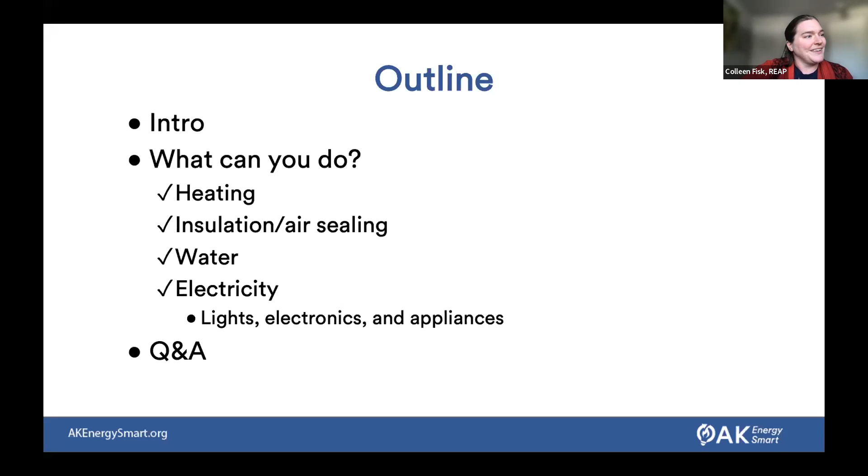When we're talking about reducing our energy use, we talk about efficiency and conservation. They're very similar and related, but conservation has to do with changing your behavior—being able to do things you can control, like turning off your lights, choosing to ride your bike instead of driving a car. Efficiency is changing your technology, like using heat pumps, which you're going to hear more about—those use that technology.

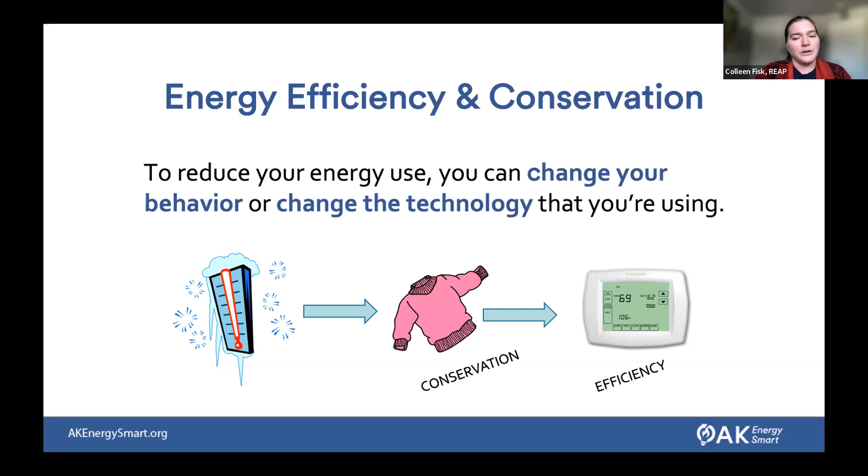Speaking of technology, Steve—oh no, did I freeze? Do you want to try turning off your share? I'll turn off my camera. Tried closing everything.

Maybe that'll help. All right, so the cheapest and lowest carbon fuel is the fuel that you never have to use. The less that you use, the less carbon, especially when you're using fossil fuels like us up here in South Central, using natural gas, or if you're using oil for your heating.

Clay threw a link in the chat—one that can be really helpful is this energy assessment checklist we've developed, which you can use to go through your home and check these things to find where you might be able to use less energy. This booklet, Energy Saving Tips for Alaskans, which Housing Finance Corporation publishes every couple of years, is a great resource too, especially for smaller things that don't require a huge investment but can make big impacts. You can download it for free, or bug Clay at his office in Juneau—he's got a whole stack of them too. I'm sure he doesn't mind people just dropping by to hang out. This is a great resource.

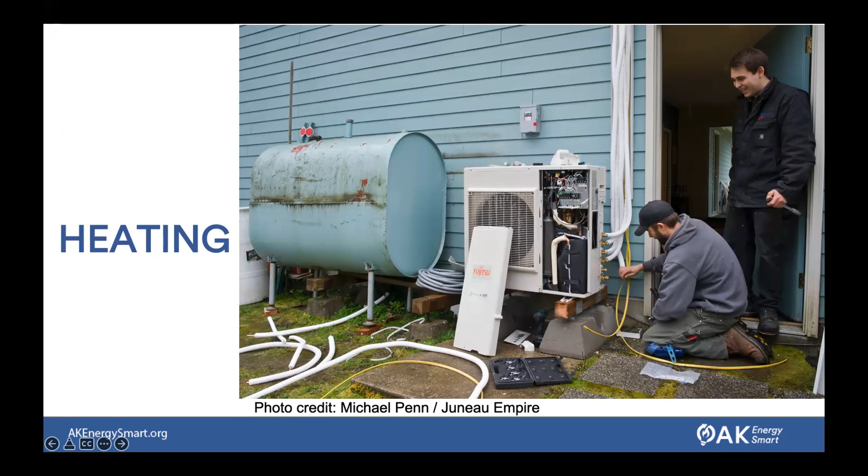All right, great. So it is definitely heating, wherever it is that you get your source of heating from—that is what we spend the most money on. We kind of break this apart from our appliances—sorry, I should have said it that way instead of just straight electricity, because sometimes your heating can come from electricity. So I misspoke, but heating is definitely our biggest energy use. In Southeast Alaska, you can see that around 69% of your household energy costs will just be around space heating. So anytime you're looking for the biggest energy savings, you want to focus on things that will save you on that space heating.

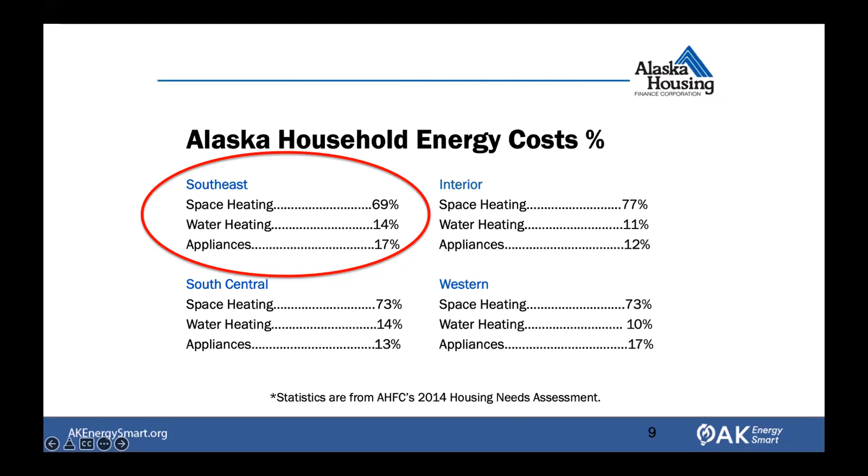Water heating and appliances too are going to be some great ways that you can reduce your energy use and carbon footprint. So Teresa asks, what are some of these things that you can do? I'm glad you ask. I have a few things that are easy to go through.

You can check and unblock any air vents, radiators, and registers. You could seal your fireplace when it's not in use and any other holes, as long as you're not sealing up anything that's supposed to be there for airflow, of course.

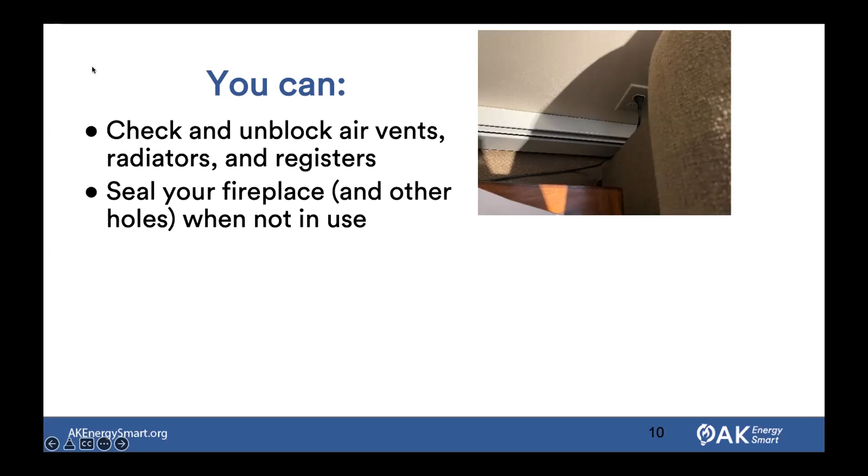You can have a professional tune your heating system. It's recommended to do that at least every year. And if you have systems older than 15 years old, you can replace those. Just like Senator Kiehl was saying in the beginning, with the improvements you see in those technologies, you get really big energy efficiency savings because of that.

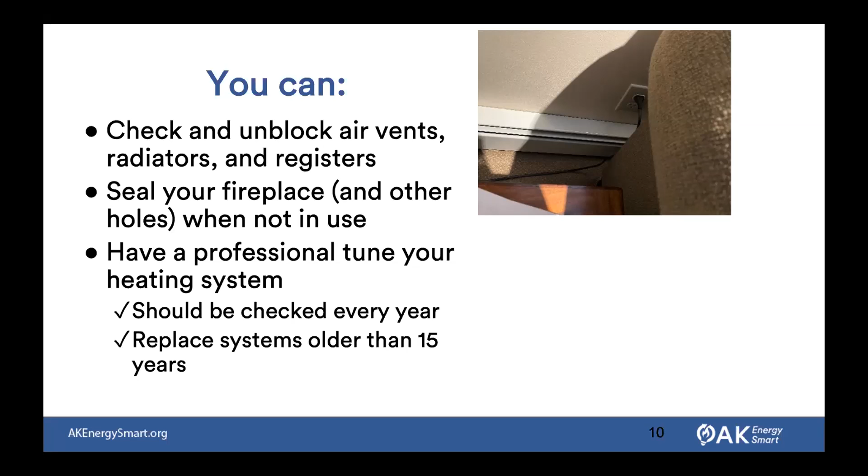And of course, they're going to try to make the case that you should check out heat pumps as your next heating source for sure. And don't leave your bunnies sitting on your air vents - that'll just keep the bunnies warm and not spread out the air.

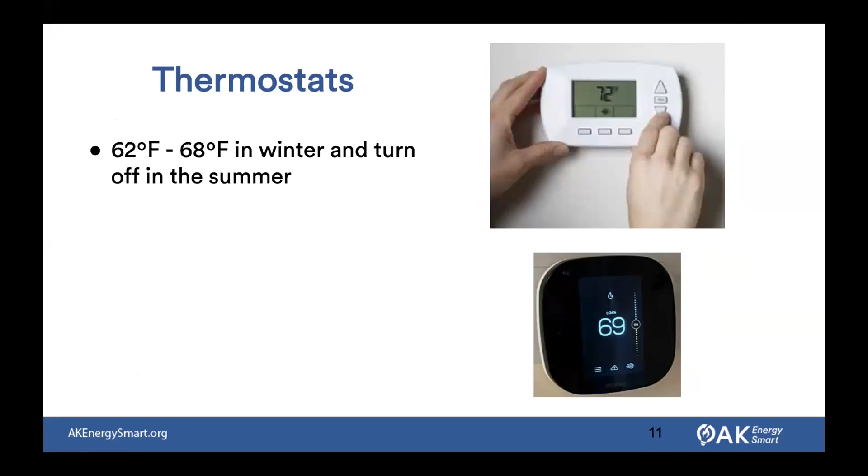For your thermostats, you can actually make big savings by just turning down the temperature a little bit. So 62 to 68 degrees Fahrenheit in the winter. And of course, most of us are turning off in the summer or taking advantage of reversing the heat pump for a little AC. Every degree that you lower for your heating can save you 2% on your heating bill.

So you don't have to be in a cold, freezing, dark house to be able to save energy. You can have really big savings even by just changing the thermostat by a couple of degrees and still not being uncomfortable in your house.

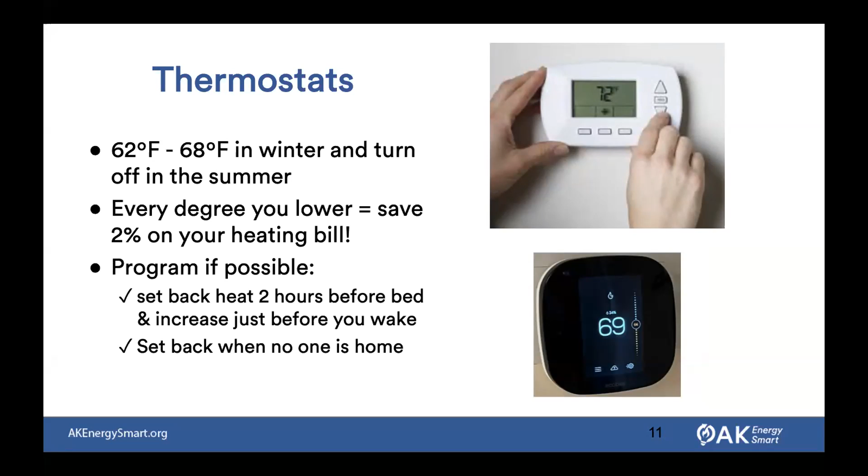If you have a heating system that you're able to program, that's going to provide big savings. So you can set back your heat, say 2 hours before you go to bed, and increase it just before you wake up, and set back, of course, when no one is home, especially if you're on vacation or gone for a weekend, or if you're away from home during work hours.

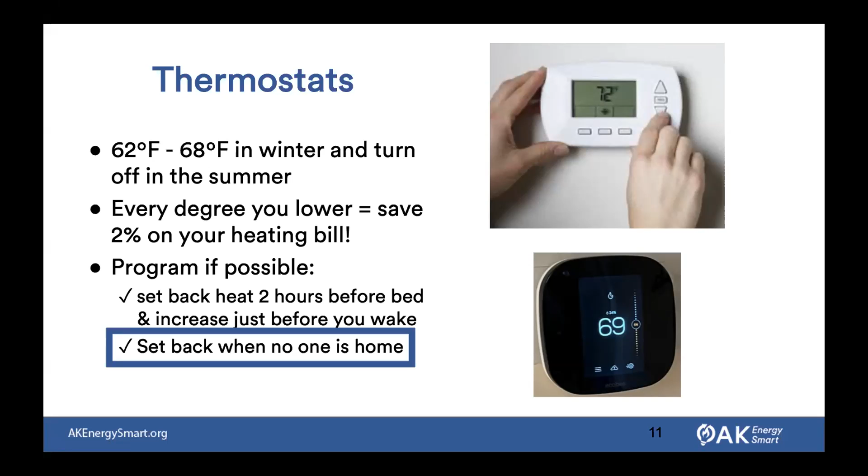That's a big one. So once you start thinking about heating and making sure you're not putting as much heat into your house, next you want to think about making sure you're keeping that heat in. So you want to think about your insulation and air sealing.

Or it could be just because you don't have great insulation. The attic is a great place to make sure your insulation is good, so you're not losing heat out through the top. Vent fans, fireplaces that aren't being used, dryer vents - if you have leaky or cracked windows, all of these are areas where heat can leak out, or if you have negative air pressure, even pulling in some of that cold air. So a lot of areas to pay attention to.

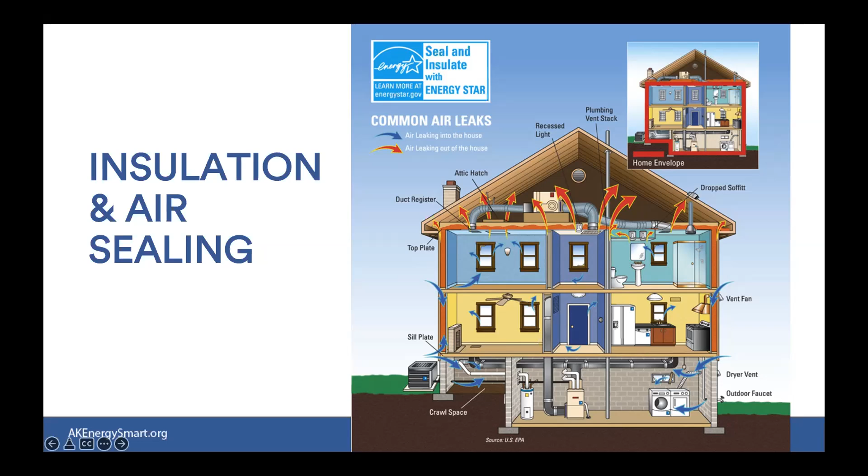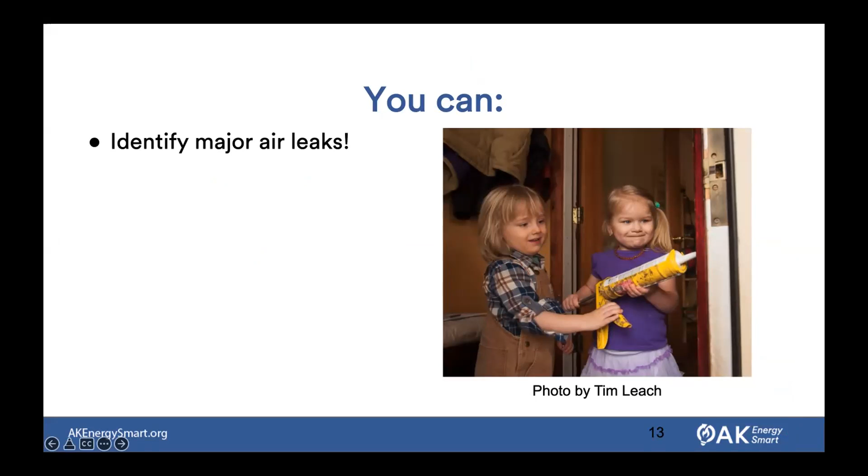So what are the ones we should be paying attention to, because there's so much there? Well, identify where those major air leaks are - find out where the biggest ones are. Of course, you might just know from living in the house. But if you want to check, you can use a piece of string or a small piece of paper and put it near windows or doors, and you can see if it moves majorly. That can be a really big air leak.

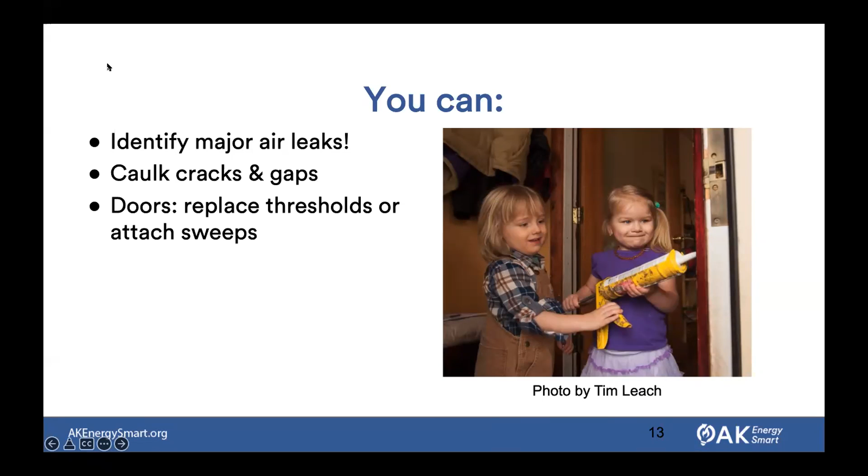You can get caulking that's really inexpensive at home improvement stores, and caulk any of those cracks and gaps around windows or doors, replace those thresholds or attach the sweeps. Even someone who's not a great do-it-yourselfer, like myself - I can do some things, but definitely not big jobs - these little jobs are very doable. I was able to replace the air sealing on my doors, for example, in a house when I purchased it.

Windows: repair and insulate. Unless you have single pane windows, it probably doesn't make sense to upgrade your windows because that can be really expensive with not much payback. But if they are cracked or have major leaks, those are the ones you want to make sure you're replacing and repairing.

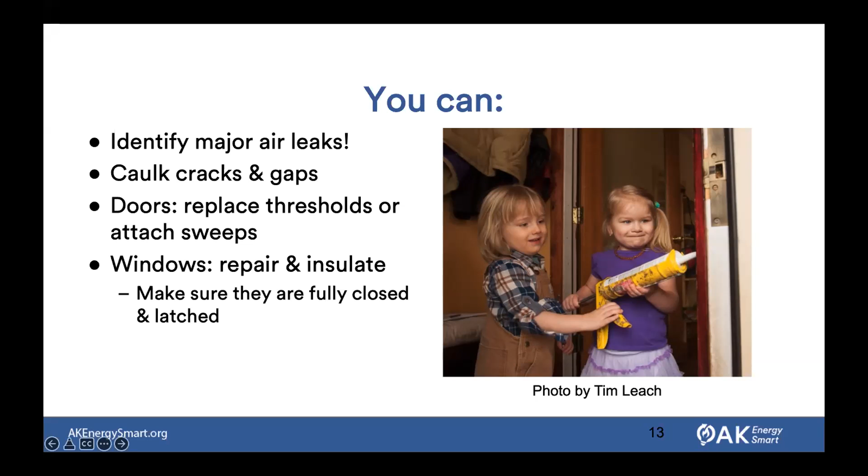Another little trick I learned recently is making sure windows are actually fully latched. If you have a latch, that can help push the seal in on the window so it's not letting small leaks escape out.

It's not just for home safety, it can actually help improve the seal around your windows. You can also install efficient exhaust fans. Like many things with efficiency, there are multiple bonuses - new exhaust fans are much quieter. If you're someone irritated by background hums, having an efficient exhaust fan is a big benefit because it's so quiet.

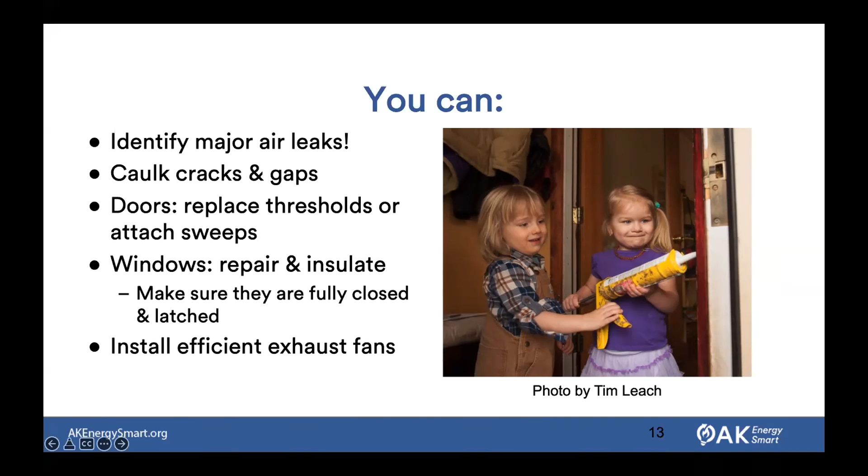For bigger projects, you can get a contractor to identify existing insulation R-values - R-value being how we measure how effective our insulation is, so the bigger the R-value, the better it is at keeping heat in. A contractor can inspect vapor barriers, evaluate and improve attic and foundation insulation, do combustion safety testing, and install a heat pump. You're noticing a theme here with efficiency, energy, and taking advantage of your climate and the technology we have.

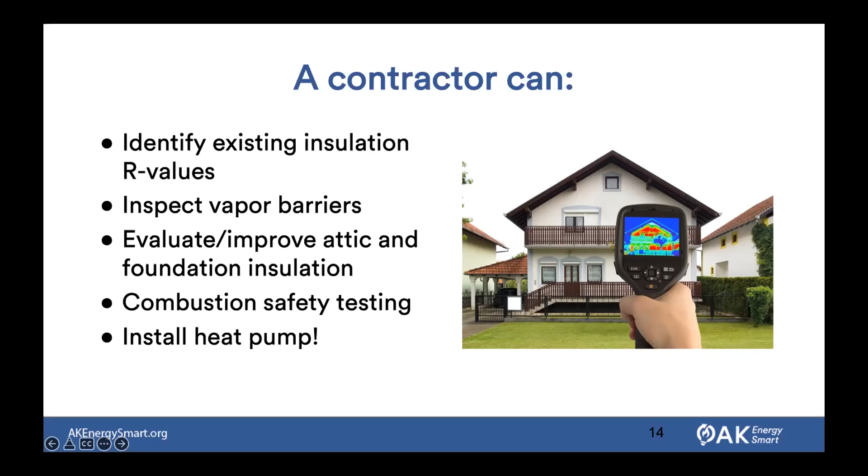So here's some pictures.

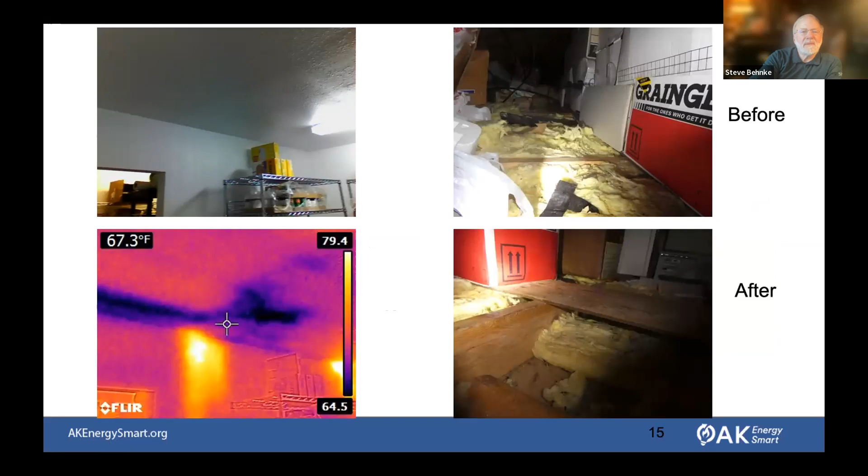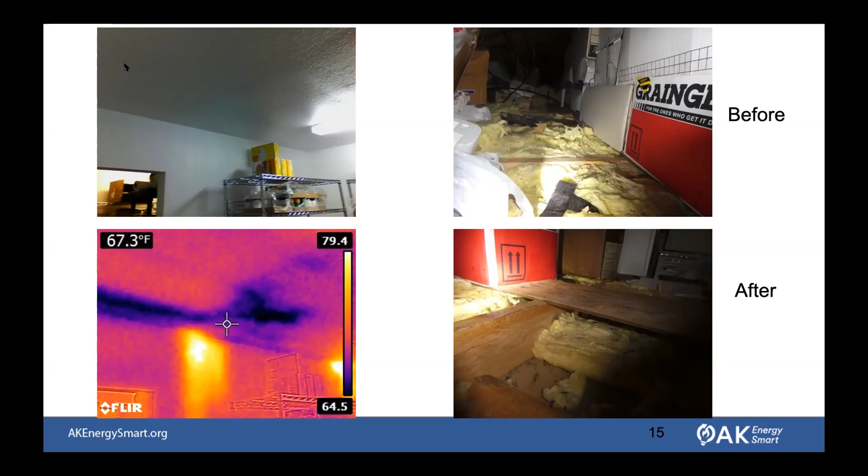Looks like we're frozen again. Maybe it's a solar flare or something, who knows what's going on, something between here and the Mat-Su. I think it's because my 6-year-old stepdaughter is streaming a movie while I'm doing this - that's probably the issue, so she could be busy. Great parenting, right? Yeah.

On the left here, with this infrared thermometer, these darker areas are colder, meaning heat is leaking out of the attic. When we go into the attic and look at these pictures on the right, you can see there were things sitting on top of our insulation, compacting the fiberglass. An easy fix is this person just put in boards and organized the attic - it didn't take fancy materials or brand new insulation, just getting things off the fiberglass so it's not compacted. Fiberglass insulation works a lot better when it's spread out and traps air better, so that was an easy fix to save energy.

So that's our heating. Remember, heating is our biggest way of saving energy and reducing our carbon footprint because we're using oil and natural gas.

Domestic hot water - there are a few things we can do here to save energy. You can check what temperature your heat is set at. If your hot water dial is set to 140, you can save 6 to 10% on your energy bill just by turning it down to 120. For safety, don't turn it lower than 120, but you can turn it down to that temperature and save - plus, as a bonus, avoid scalding or safety issues from it being too hot.

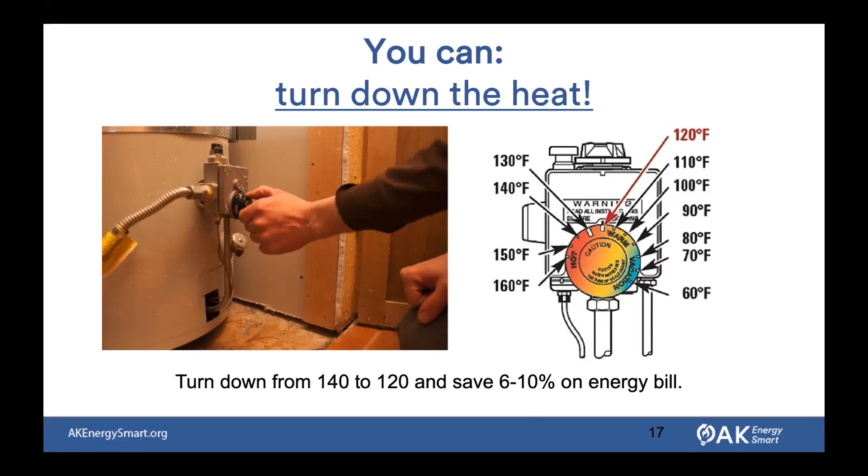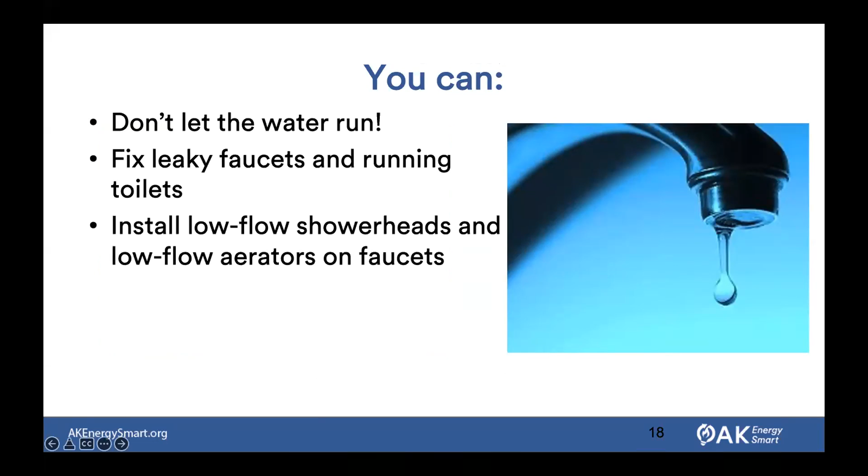Other things you can do: not letting the water run - we've been hearing that for 50 years, but it's still a place to save energy. Fixing leaky faucets and running toilets, installing low flow shower heads and aerators on faucets - small, easy things. And if the manufacturer says it's okay, you can add a blanket to your older water heater, and even potentially upgrade or downsize your water heater, especially if you have an older system.

So that's your tips for water, short and sweet. The biggest one, of course, is checking the temperature your hot water is set at.

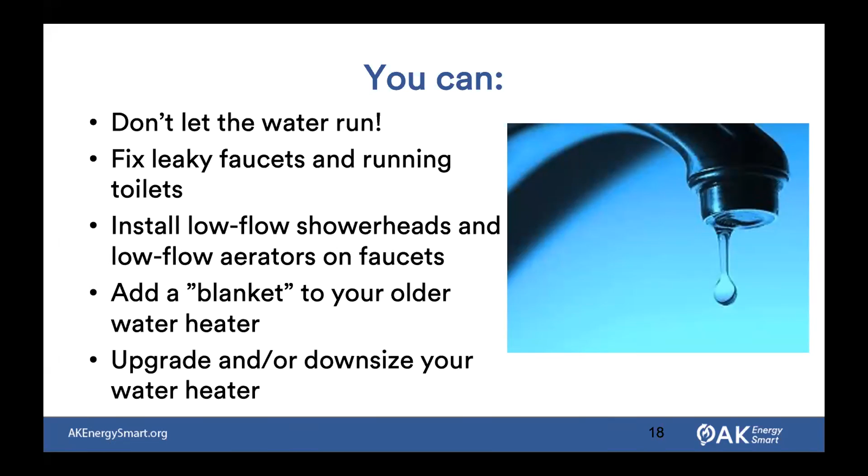On the electricity side of things, instant water heaters are definitely a lot more efficient than keeping your hot water constantly heated at all times. A boiler holding water at temperature uses more energy than an instant hot water heater that only heats as you're running the water.

For electricity, we really talk about knowing how much you're using. You can't manage what you don't measure. So pay attention, using your electric bill. Here's an example that was generously shared with me, an AEL&P electric bill, and you can look at how much energy is being used.

This one's on the larger side. I'm guessing there's a heat pump involved in this house, so a little bit on the higher side, but you're able to track this and look at your trends over time. This is a great little graph that's included with your electric bill.

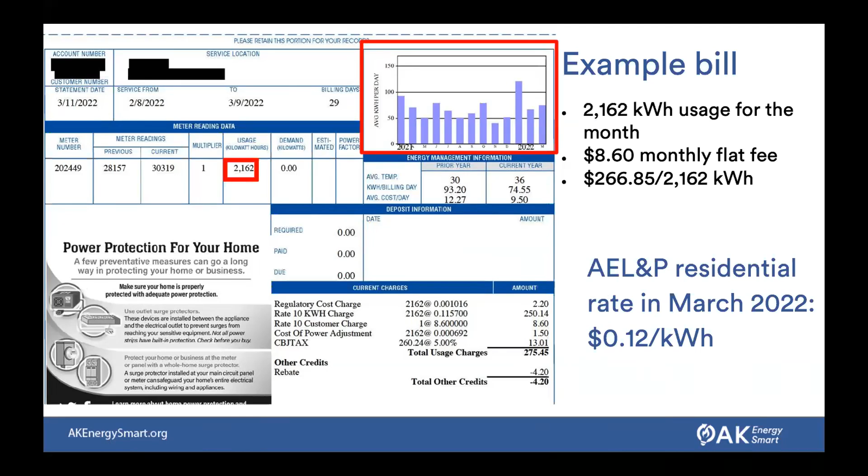You can see your residential rate, so AEL&P is about 12 cents per kilowatt hour compared to 19 to 20 cents per kilowatt hour for us up here in Anchorage and Mat-Su. Another cool thing is your online management system will also have even more details.

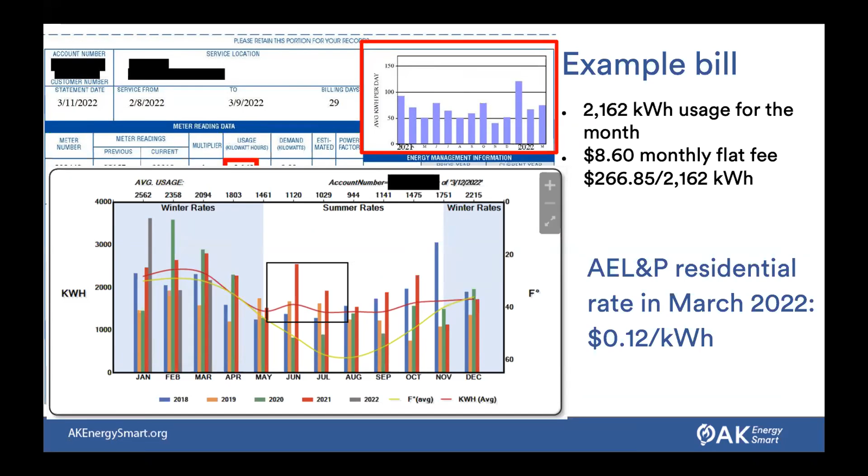There's a nice little graph comparing your temperature to your electric usage over time. So if you're a nerd about energy, which I'm just going to guess you might be if you're here with us tonight, this is a great way to dig into it by taking advantage of that online portal for your electricity usage.

Once you're looking at this, you're keeping track of your electricity. Lighting is going to be the biggest savings on your appliances and electricity, aside from, of course, any heating that you're using from electricity.

We've been hearing for 50 years: turn off the lights when you're not using them, and use more efficient lighting. Most of us are aware of LED light bulbs, but check the ones that use the most, potentially Energy Star fixtures and lamps.

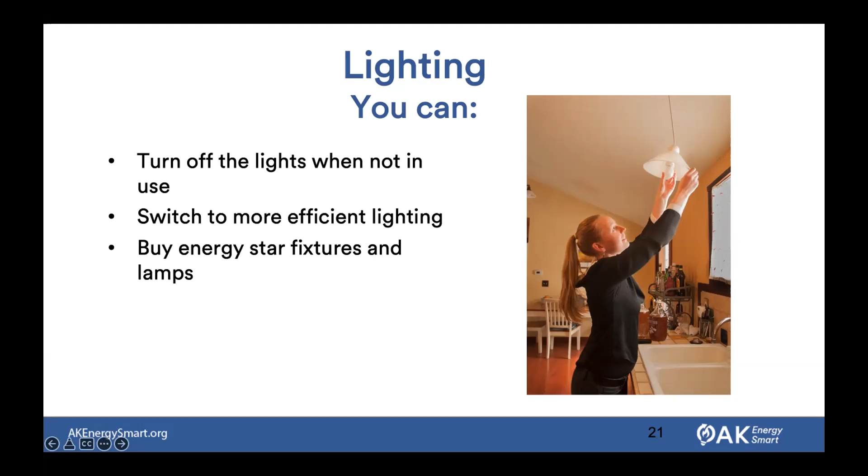You can upgrade some older fixtures that might be using energy inefficiently, but really think about timers and occupancy sensors, just like Clay was saying earlier about timers on your exhaust fans. Timers on your lighting is a great way to look at this as well.

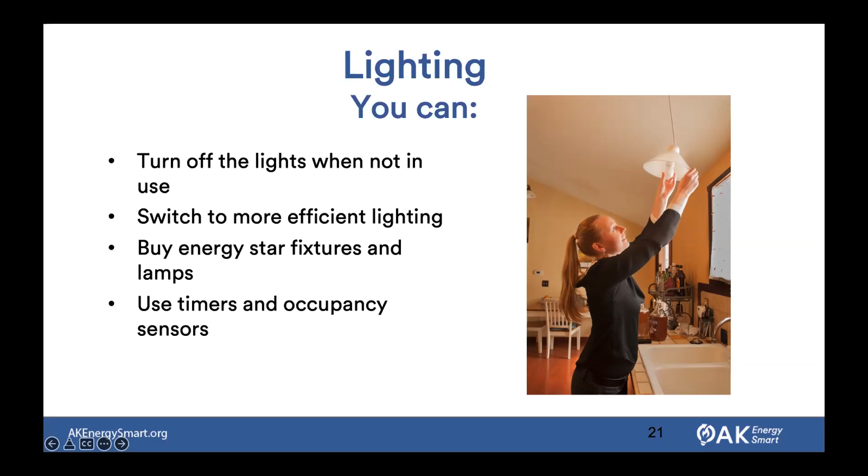Occupancy sensors, think more of that on a commercial scale. I'm in a lot of schools, so I see those a lot. Timers on heat tapes are a great one too.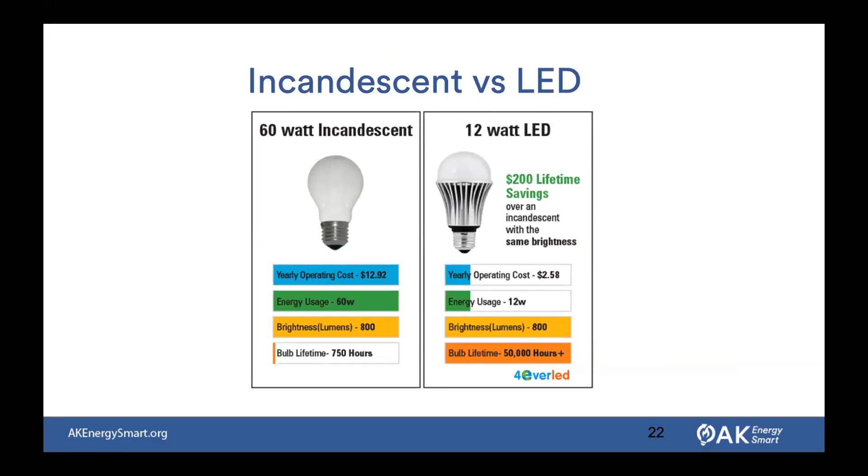If we do some quick math in Juneau at 12 cents per kilowatt hour... oh, did I not finish this math? Okay, well, it's a big savings, I could have sworn I did that. All right, you'll just have to trust me - there's a big savings. It saves you a lot of money. Use LEDs.

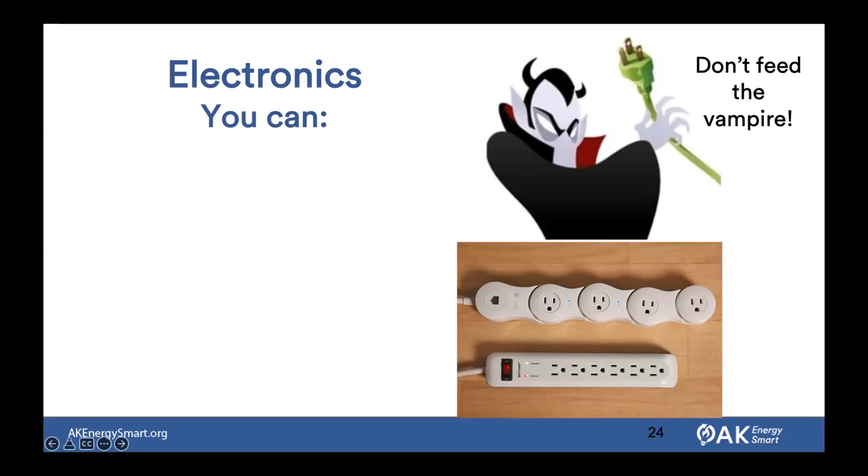All right, another thing, here's my fun 'do the math.' You do the math, Clay - let us know, throw it in the chat for us. I don't want to use up all my time, already at 20 minutes, got to make sure I keep going and give everyone else time to chat too.

So there are these things called vampire loads or phantom loads - we say don't feed the vampire. Vampire or phantom loads are things using energy when stuff is still plugged in but not turned on and not being used. A very small phantom load, for example, would be like the clock on your microwave, still drawing a tiny bit of energy even when you're not using it.

But bigger phantom loads could be things like TVs, if you still have an old cable setup or a DVR system - those things are using energy all the time, even when they're not being used for what you think. So anything you can put onto a power strip and turn off when not used is great. Like my home office setup - I have my computer, second monitor, and task light all connected onto a power strip that gets turned off at the end of the day when I'm done working.

Turn off the TV, like I said, that's a big phantom load, and anything associated with the TV too. Put things in sleep mode or use those sleep timers as well. Timers are a powerful tool, use our technology to our advantage.

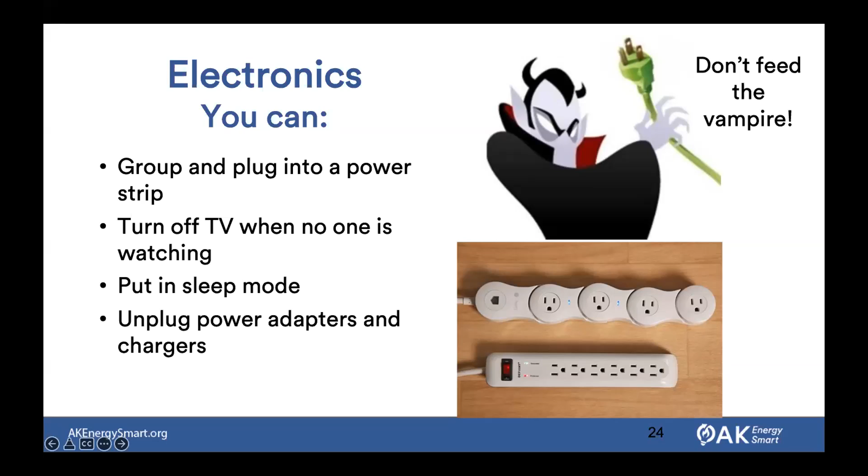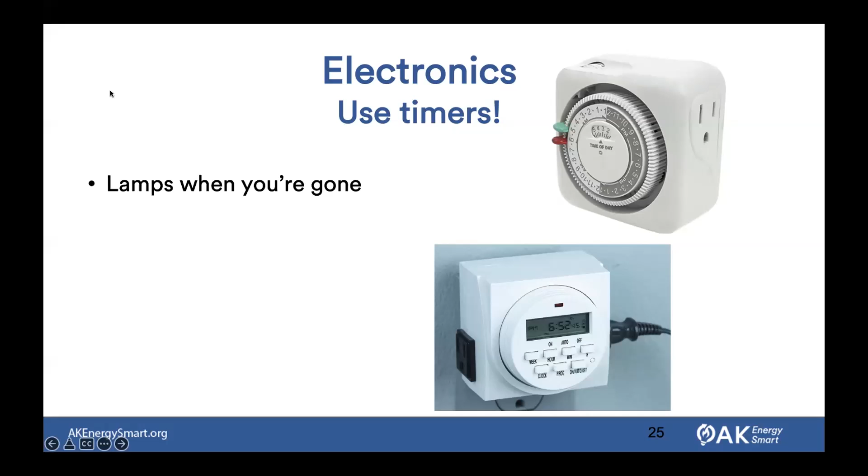Timers, have I mentioned timers yet? So take advantage of this. This is a great one, like lamps for when you're gone, especially if you're going to be gone for a longer time. A lot of people use these for having the lights come on and off at certain times of day. We use these for our holiday lights, for our tree and inside and our outdoor string lights we have up. They're not on all of the time.

Heat tape, Clay put that in the chat. That's another good one to use a timer on. It can be a big energy draw, and you don't necessarily need it on all the time. I think some sensors are also temperature dependent, like I have that for the hot water heater and my horse's water trough, so it's not drawing energy if the temperature is warm enough.

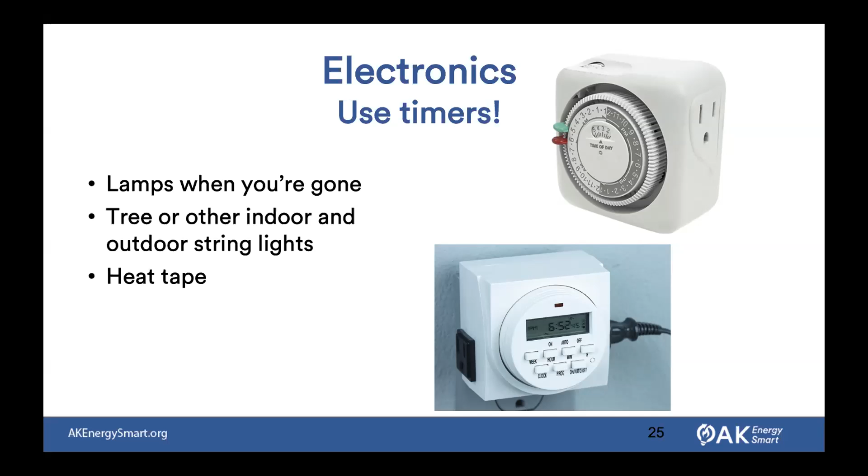So take advantage of timers. And with electronics, when you're replacing major appliances, purchase Energy Star rated ones. One thing you can also do with an Energy Star rated dishwasher is use it — it uses way less water, especially hot water for washing dishes, than doing them by hand, by a lot. Only run it when full, or use that half-load setting when you have a half load.

Clean out the lint from your dryer and check the temperature on your fridge or freezer. Anytime we're looking at temperature like this, it's using a lot of energy to pull that heat out. This is a reverse heat pump — we talk about heat pumps as reverse refrigerators, so I'll call a refrigerator a reverse heat pump. We're pulling heat out of the fridge and freezer.

Making sure you have it in that ideal range and not colder than you need it can save energy. Clean the coils and check for leaks in the door seal. You can put a piece of paper in the door and close it on it — if the paper can be easily pulled out or falls out, the seal on your refrigerator isn't very good. That's a great way to check the seal and know if you're having leaks.

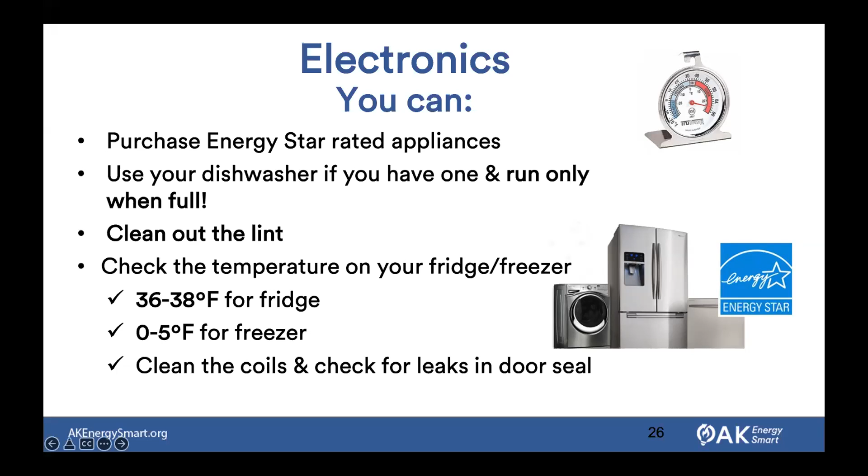So here's a takeaway: energy conservation is free, it doesn't cost any money to make some behavior changes. These are some of the easy ones most of us already know — turn off the lights, put electronics on power strips and turn them off when not in use, turn down the heat on your thermostat and water heater. Heating is going to be your biggest energy cost, and therefore the biggest energy savings you can make, and carbon reduction as well.

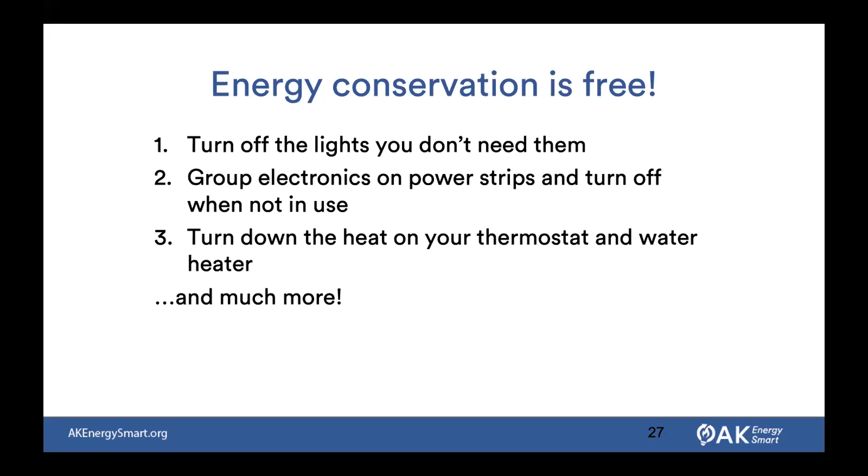Efficiency — looking at our technology and better materials may cost some money up front, but will save you in the long run. Some efficiency measures are really low cost or do-it-yourself and can make big differences. Please check out the energy assessment and the home energy saving tips that Clay linked in the chat, because those will help you identify what those are.

If we think about payback — if we invest money in these efficiency items, how long will it take to pay back? A setback thermostat we can program to reduce energy is going to be less than a year. Lighting is a year or less, switching out any bulbs that aren't LEDs already. A heat pump is going to be closer to 9 years, but since heating systems last that long, it's still a huge savings.

Something like an HVAC or boiler is going to take a bit longer, like 15 years. And anything related to the envelope is going to be really expensive to do because it can be tricky to get into the envelope and fix it, so it's a longer payback. Unless you have really major issues with your envelope, just pay attention and make sure you're seeing what makes sense for you.

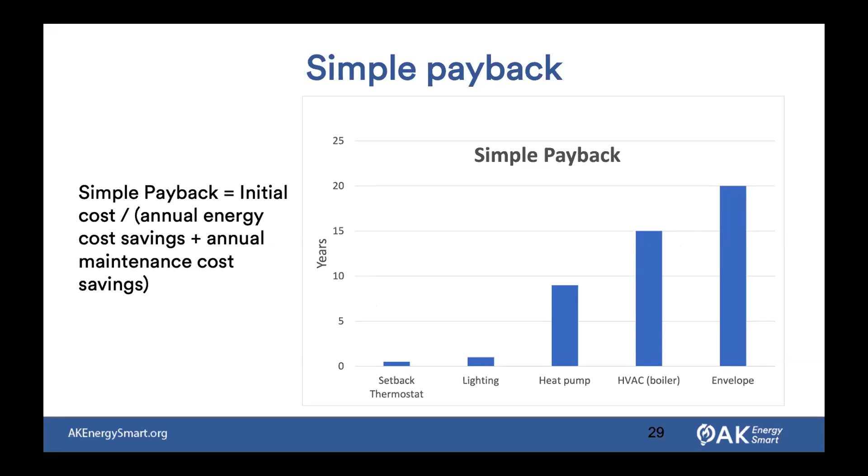You can't manage what you don't measure. Look at what your energy bill is each month. Pay attention to how often you're getting your heating oil delivered, and become aware of those habits and usage. You can use an electricity monitor. AARP lends these out, or you can go bug Clay at the REAP office in Juneau. He's got some he's happy to lend out, along with a little thermometer. You can get huge savings, reduce your carbon footprint, save some green, and be green at the same time.

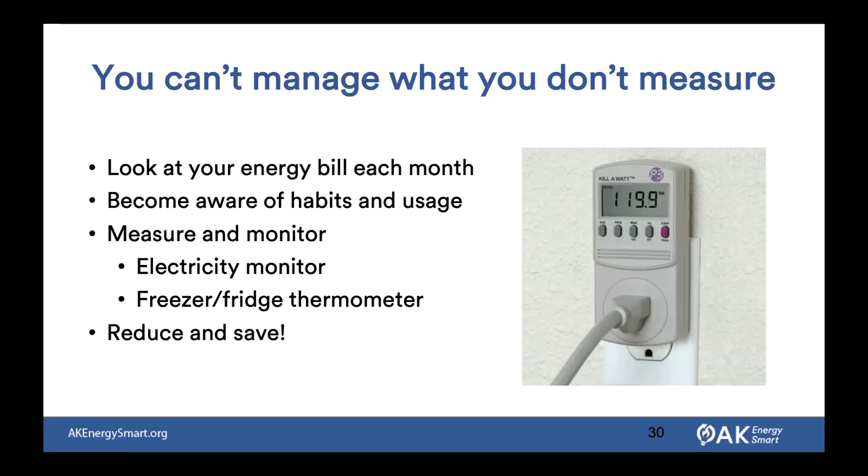I'm sure that connection won't get old through this series. Check out these resources, the ones that Clay shared in the chat. You're going to hear from Alaska Heat Smart as well tonight, Renewable Juneau. Alaska Housing Finance Corporation has some great resources too, with an online library full of things you can check out. And we have a library of resources as well on our own website at Renewable Energy Alaska Project.

You don't have to be an expert to start saving money. You can do it, you've got this. Like Steve said, we want to empower you to be able to make these choices. And even if sometimes these choices seem small and may not have a huge impact on the carbon overall, you doing this and sharing with others, teaching others, we can all make a difference together. So please do share. Gunalcheesh, Koyana, Mashi - I really appreciate this time.

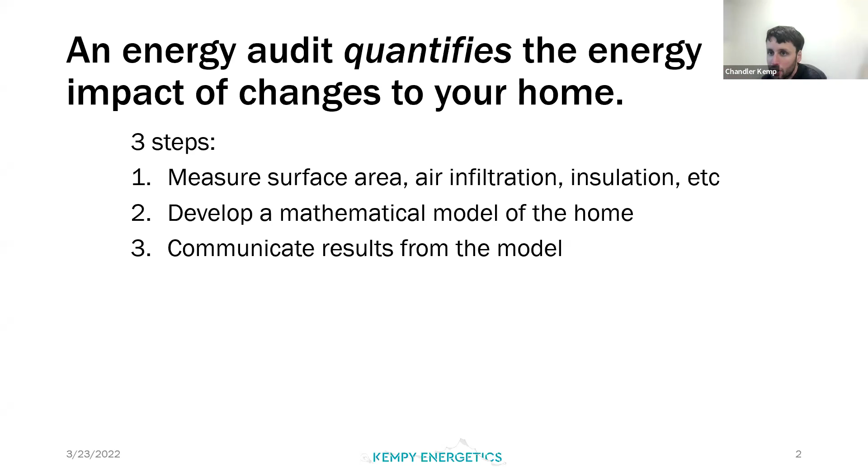The second step is developing a mathematical model of the home. To do that, I take all the data I collected on site and put it into a computer program, which gives an estimate of energy use as the house is today, as well as how energy use would change if we make improvements to the house. The final step is communicating results from the model with the homeowner - that always includes a report documenting the findings, but ideally also a phone call or in-person meeting to talk about the report and address any questions. So the three steps: measuring the house, developing a model, and communicating results.

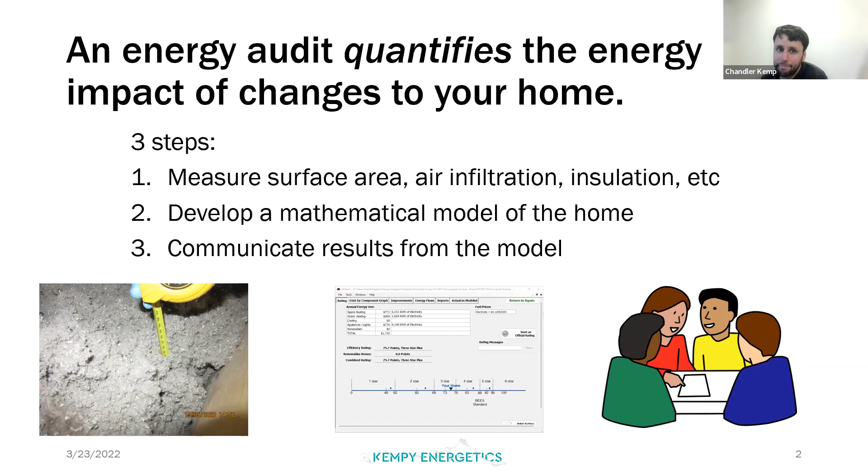When I go to a house to do an energy audit, I'm usually inside for 2 to 4 hours. Most of that time is spent making measurements of windows, doors, and insulation. But the final hour or so is spent doing a blower door test. I've got my blower door set up in the doorway of my apartment, so I'm going to give you a little show and tell here.

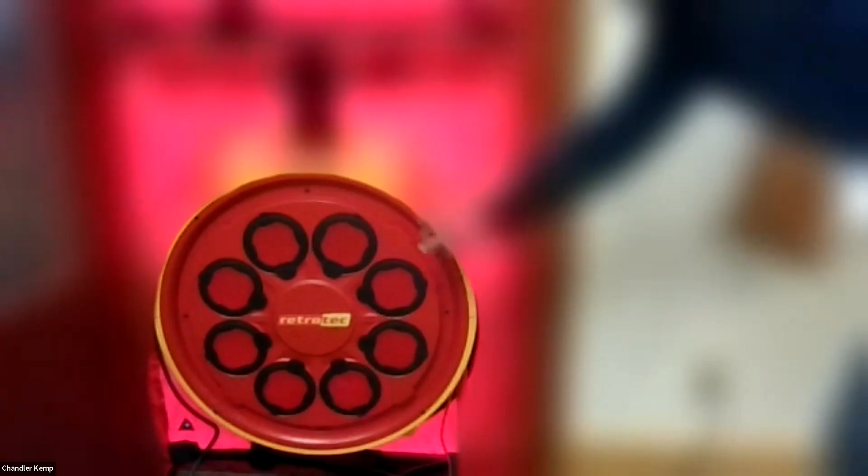It's a canvas sheet that I put in the doorway to the house, and it's got a big fan in the bottom. It works by turning on the fan, which blows air out of the house to maintain a pressure difference between the inside and outside. It measures how much air it takes to maintain that pressure difference, and that gives us a direct measure of how leaky the house is.

So that's the blower door test, one of the key parts of the audit. Another benefit is that while the blower door is running, it's pulling cold air into the house, which makes it really easy to find those sources of air infiltration that Colleen was talking about. I'll even walk around with an infrared camera so you can get a visual image of the air coming into the house.

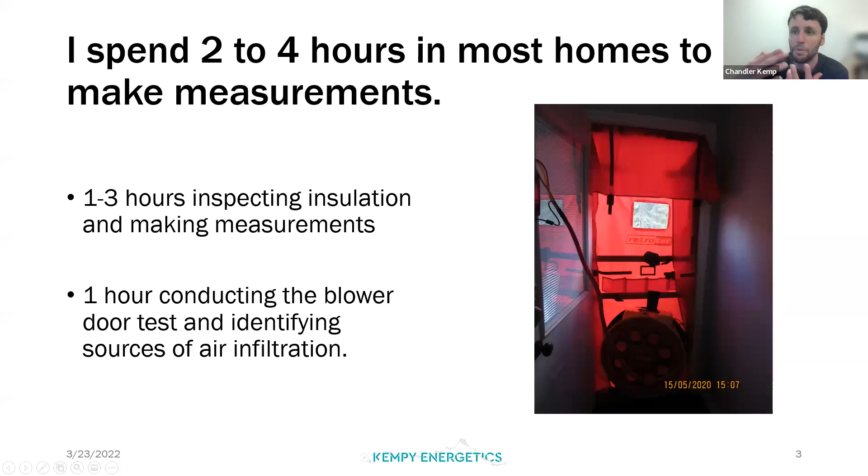So those are the two pieces: measuring the house, and the blower door test. That's what I'm doing when I'm on site. In the next couple of slides, I'll show you what results from an audit look like. This is an example from a house I worked in last year as part of the Thermalize Juneau program, and the owner was generous enough to let me share this picture and some of her results for this presentation.

One type of result is a description of how the house currently uses energy. It might look something like this, where the costs of energy loss through the house are broken down by different house components. Heat loss through the floor costs about $199 per year in this house. Heat loss through the walls and doors costs about $600 a year. And then finally, air infiltration - those leaky places Colleen mentioned, where you might seal them with some caulk - is costing about $600 a year.

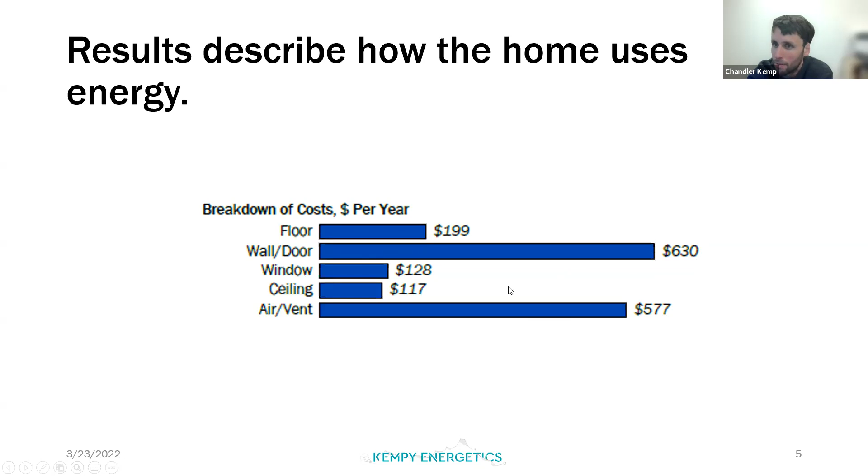So I think this is helpful to conceptualize what parts of the house you might want to focus on if you're thinking about efficiency improvements.

For example, if you caulk and seal the house to reduce those air leak points, you're probably going to save about $75 a year in this example. We might expect that caulk to break down in 10 years or so, so as long as you can get a contractor to do the work for less than $700, it's a pretty good investment.

Similarly, in that house, there were some sections in the basement where maybe somebody forgot to insulate them, or the insulation had fallen out over the years. Insulating those areas of the basement that didn't have any insulation will save about $200 a year, and that insulation is going to last a long time. So even if it's kind of expensive to get done, it's a pretty good investment.

The final example is that house had metal frame windows. Metal frame windows are about the least efficient type of frame you can have, because that metal conducts heat right out of the house. If you replaced all the metal frame windows with insulated frame windows, you could save about $150 on your heating bill, and they'll last quite a while, so break-even cost of about $2,500. But replacing windows is so expensive that even with significant savings, it's not a great financial investment. So if you're going to do that, you should be doing it for some reason other than saving money.

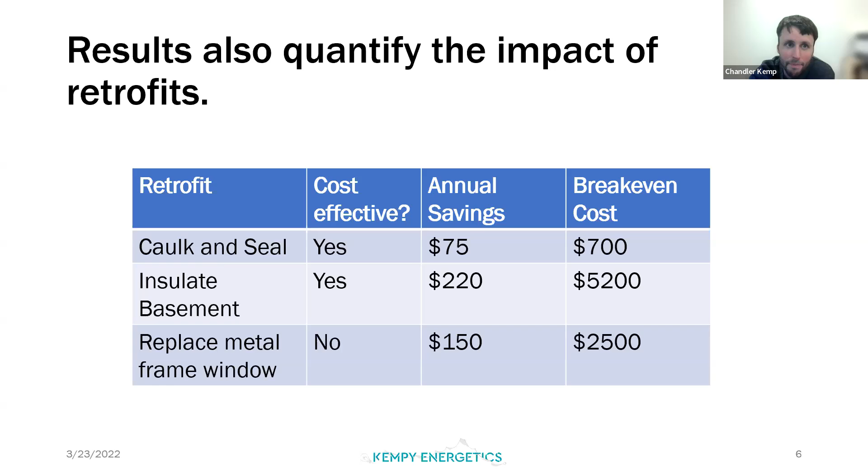I want to share some hot takes on common, cost-effective energy efficiency measures that I see when I'm doing audits in Juneau. It was great to see that a lot of these overlap with what Colleen was saying, so I'm glad we're on the same page.

Colleen hit programmable thermostats. They're great, they don't cost very much. You can turn the heat down when you're away from the house or asleep, and the payback is very good.

Finding uninsulated spaces is surprisingly relevant to a lot of houses. Everybody knows insulating your house is important, but I'm often surprised by how frequently there are areas that are uninsulated for one reason or another. One really common case is where there might be a stem wall or even a cement slab in a heated part of the house, and the edge of that slab is uninsulated, so heat can easily conduct through the cement and out the side of the slab into the ground and away from the house.

Colleen mentioned that improving the envelope of the house is often not cost effective, and that's definitely true. But the exception, I'd say, is if there's a part that has no insulation at all — then the payback can be pretty good, especially for something like this, where just adding rigid foam on the outside doesn't require getting into the envelope too much, but can have a big impact on your heating bill.

There's been a lot about heat pumps. I'll just say that they're great, especially in a climate like Juneau.

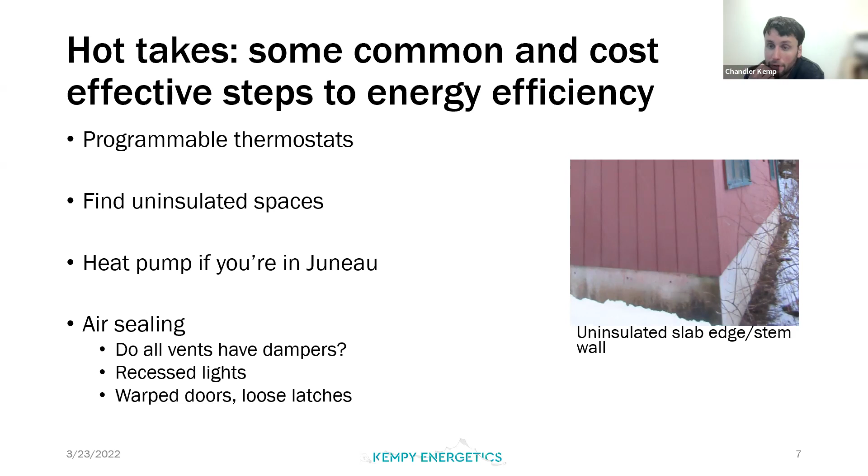The first is thinking about dampers on vents — like if you have a range hood vent or even a bathroom fan. There should be a damper either on the exterior of the house or integral to the fan itself, so that when you're not using the fan, there's not an open path for air to flow in and out of the house. Just checking to make sure there is a damper there and that it's not stuck open can be a really worthwhile thing to check.

Another one is recessed lights. If you've got lights mounted inside your ceiling that were put in before LEDs, the can the light is in probably had to be vented to the outside or to the attic so your incandescent bulb didn't overheat. That means it's a direct path for cold air to come into the house. Now with an LED, they don't produce so much heat, so they don't have to be vented. You can take out those cans and put in a regular fixture, or even just a thin surface-mount LED on the ceiling, and have similar lighting quality without the vent to the outside.

The picture I've got up here is, I think, from the house I showed a couple slides ago, where she had a recessed can light. This is an infrared image I took during the blower door test, and the blue you can see is all the cold air coming in through that recessed can. That's a pretty common thing I see in Juneau, where people can replace those cans with LED lights and a regular electrical fixture and reduce air infiltration a lot.

The last point is air sealing around doors. It's easy to think about weather stripping, but often the problem is that a house might have good weather stripping, yet the door is still really drafty. That's often because the door is warped, or maybe even the latch — like in my apartment, one of the screws holding the latch in had been stripped, so even though the weather stripping was good, the door just wouldn't shut tightly. Taking out that screw and putting in a bigger screw had a nice impact on the air infiltration. So when you're thinking about weather stripping, going that extra step to consider the whole system of the door is worthwhile.

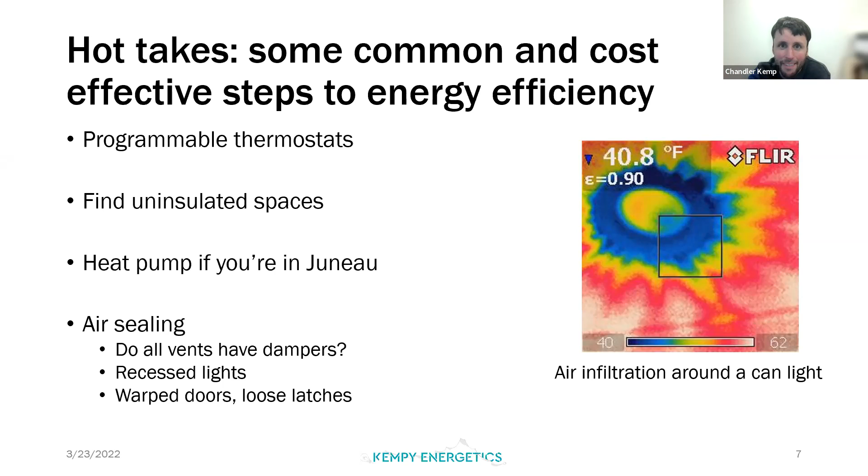Okay, so this is the last piece I wanted to touch on. I think Jesse mentioned in his presentation earlier that his house went from like 2 stars to 5 stars after he did all the retrofits. So that's a huge improvement. And I just wanted to give a little bit more context for what the star rating is.

So the star rating is a system that was developed by the Alaska Housing Finance Corporation. And the general idea is that the more energy efficient the house is, the more stars you get. And it's more or less proportional to the amount of BTUs that you consume in a year.

So for that example house I showed, it was 2x4 construction, R13, so regular fiberglass batts for insulation. I think it was getting about 8 air changes per hour, so a little bit higher than average air infiltration for a house in Juneau. And that ends up being a 3-star plus house. So you can kind of think of the 2x4 house, kind of average construction, ends up being around 3 stars. With the energy efficiency measures that I suggested, it could get up to a 4-star plus house.

And then to get up into like the 5 or 6 star range, you really need to be thorough about the insulation. So at least 2x6 stud walls, ideally more. A heat pump really helps with the star rating. Like a tight envelope - the house I gave as an example was around 8 air changes per hour. A really tight house will be down around 1 air change per hour. And that's what it takes to get in this 5 to 6 star range.

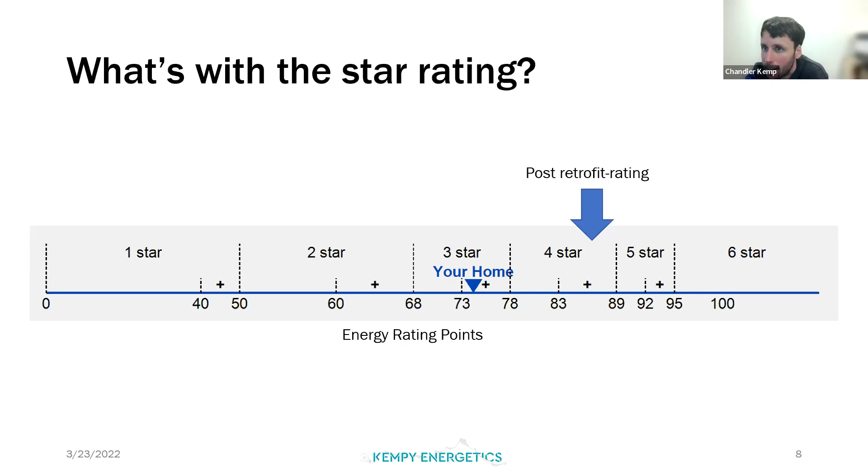Yeah, and I think that's all I've got. So I'll pause here, and if anybody's got questions, I'd welcome them.

If there's time, Steve. Yeah, anybody got any questions there for Chandler? Thank you, Chandler, very much. That was a very clear explanation of what an energy audit can do for you. I think it's a great follow-up from Colleen's information.

You can still put questions in the chat if you want to, but let's go ahead and move along to talking about Alaska Heat Smart and its services, which is going to focus a bit on heat pumps, but also on some other topics.

Andy Romanoff's the executive director of Alaska Heat Smart. He's also a board member of nonprofit Renewable Juneau that's been offering information and workshops on heat pumps since 2016. Andy, the platform's yours. Thank you, Steve. And thank you, Linda and Colleen and Chandler and everyone here. This is a great load of information for people, and I'm happy to be a part of it.

I'm just going to briefly talk about Alaska Heat Smart, like Steve said, and some of the services that we offer. Primarily, or the most important piece maybe that I'll address for folks out there in Zoom land is the Alaska Heat Smart Home Heat Pump Assessment, which is kind of what I'll hit towards the end.

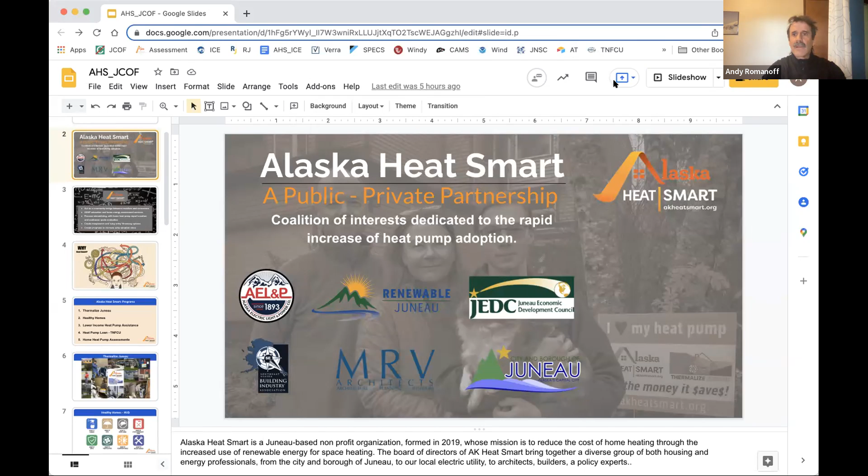So let me just bear with me while I find my screen here. Is that working? I can't see what you're seeing. It says double click to enter full screen mode. Technical failure here. Hang on, let me start over. Try that again. How's that? Well, it's saying you've started it, but it says you need to double click to enter full screen mode. There you go. How about that? Okay, let me just find my notes here. Everything's all over the place. This is why we test things, right? Because we did test this. Okay. There you go. You got it.

Well, I'm not seeing my notes, so I'm just gonna go without. But yeah, so Alaska Heat Smart is a nonprofit public-private partnership that came together back in 2019 with the help of all sorts of different agencies, and it brings together lots of different expertise from multiple sectors of the community - our local power utility, nonprofits like Renewable Juneau, the city and borough of Juneau, architects, builders, economists, policy people, all on board with the aim of rapidly increasing heat pump adoption in Juneau and lowering the cost of home heating for local residents, as well as for other Alaskans outside of Juneau.

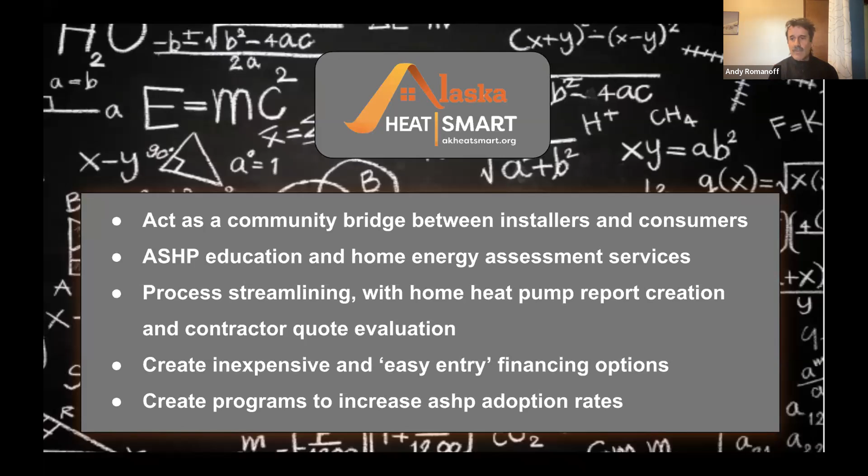We're increasingly getting calls from around Alaska for advice. Essentially what we're trying to do is act as a bridge between the consumer of a heat pump or energy efficiency improvements and the installers and contractors that offer those services. We do that in a number of ways, with programs I'll get to in a moment. We offer education and consulting on these issues, trying to make things easier and more understandable for the consumer.

So why Alaska Heat Smart? Why do we need this service?

It's very likely that if you, the homeowner today, decide you want a heat pump and reach out to 3 or 4 different contractors for quotes, you're going to get very different numbers and very different packages of options, ranging anywhere from, say, $5,000 to $20,000. It happened to me.

My head was spinning and I was confused. So what did I do? I did nothing—I just got paralyzed and kept burning oil, until finally a new contractor came to town and offered great pricing and said, let's just do this simply: take out your oil stove and put in a simple one-to-one heat pump. I was on board.

So Alaska Heat Smart is here to eliminate the confusion and streamline the process, to make it easier for you, the homeowner, to know what your home needs and how to go about getting that.

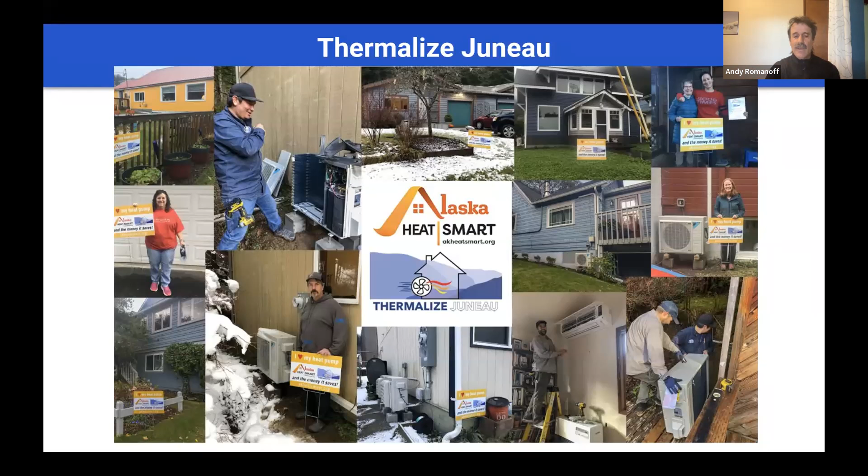The end goal of this is to create a guidebook manual so other communities can take on these concepts as well, implement them, and share our lessons and successes in their communities.

We just received a $2 million grant from the Department of Housing and Urban Development—a really exciting boost to our programming. It'll allow us to remediate maybe 90 lower-income family homes, ideally removing their oil-based heating systems and replacing them with heat pumps, but also performing air sealing work, insulation work, tightening up leaks in doors and windows, and getting rid of mold and mildew issues and irritants like dirty carpet causing asthma-type situations.

So this is just getting going. We're still working with HUD to get this thing rolling, and it'll go on for about 4 years or so.

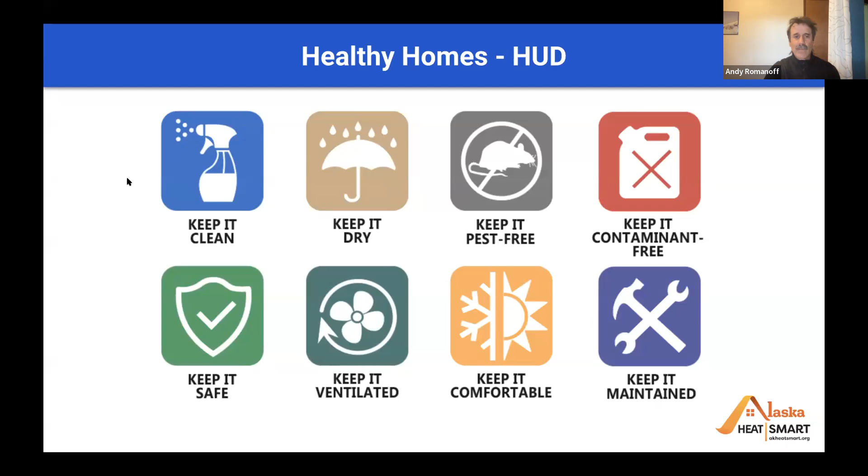Our newest developing program, which we're still stirring around names for—this is my latest—the Renewable Energy Heating Assistance Program, REHAP. You can rehab your home, get a home rehabilitation.

This is a community grant, thanks to Senator Lisa Murkowski, who has provided Heat Smart with an infusion of funding, which will allow us to reach maybe 70 at most lower income family homes. This is primarily looking at just heat pumps without the whole home remediation piece, so a little more focused. We'll probably be working with Renewable Juneau's Juneau Carbon Offset Fund on this, because they've been doing it for 3 years now and have a process in place for vetting applicants and assessing homes, making sure such homes will actually work well with a heat pump as an addition.

Onwards to our loan program, we're seeing increased uptake. People don't really seem to like loans, so it's been slow to bring people on board. But if you're a homeowner who has had an Alaska Heat Smart Home Assessment, you're then eligible to apply for this loan.

At 4 to 6%, say you get a $7,500 loan for 5 years to finance the installation of your heat pump and the wiring, you're really only going to spend like $13 a month on interest. And on average, for Juneau at least, a home that puts in a heat pump and displaces much of their oil burning will be saving about $70 a month.

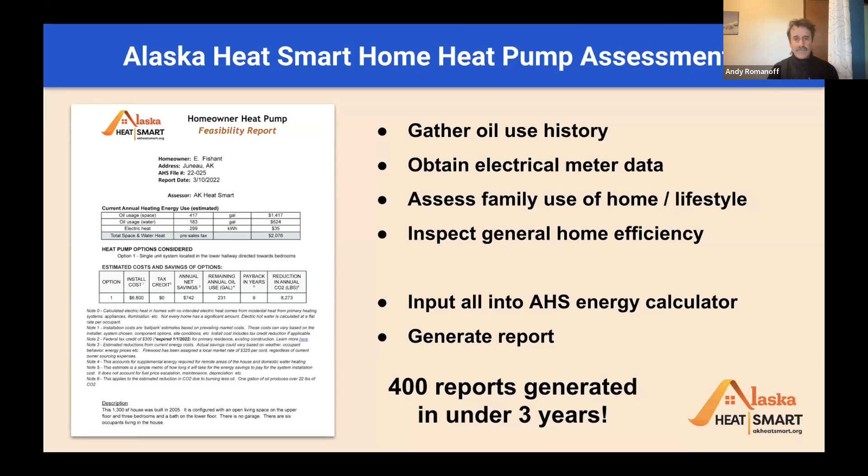They gain confidence in understanding how their home works, kind of what Chandler was saying with the energy audits. You learn a lot about how your home works, what maybe is not working, what you need to improve. But you come away with a sense of knowing what you need and what may work best, unlike that person back at the beginning with their head spinning and all the options coming at them. Now you've got a report that says, this is the option I want to consider.

And you can take that to the installers, to the contractors, and say, this is what I want. What's it going to cost me? As opposed to, I want a heat pump, but I don't know anything about them. What do I do? Now you're in charge because you've had the assessment.

Not only can you get the loan and get into the game in that way, but you now have control over your data, your home, and you are in a much better position to get direct feedback from the installer. So we have a little video here from a Thermalize Juneau participant, Allison Bidlack, who lives in Douglas, Alaska. She swapped out her oil stove for a heat pump, and she is ready on her couch to tell us all about it.

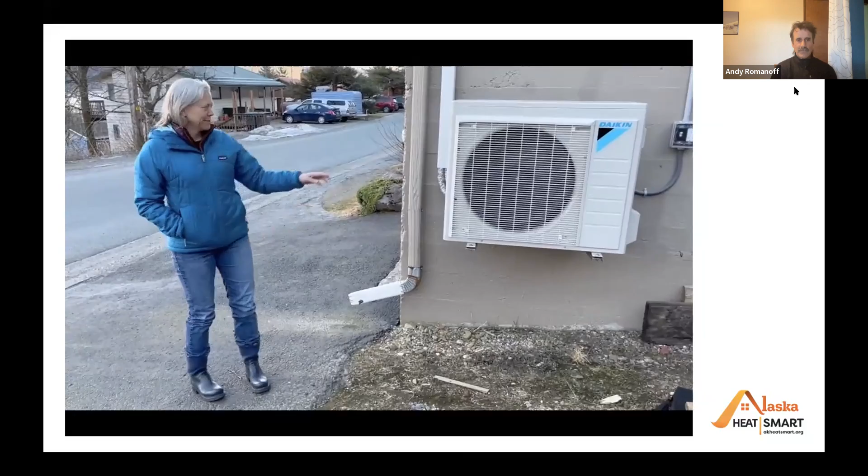How big is the house? The house is 1,500 square feet. How did it work during the winter? It worked really well. This is the unit, and it just kind of runs all the time. It does create a little bit of a glacier as the water condenses and drips out. So when you install one of these, don't put it right in front of your garage or your front door like I did. But yeah, it works really well. It just seems to withstand the wind and the snow.

Was it complicated to have it installed? No, it was actually surprisingly easy. The electrician had to come first to install a dedicated circuit and the wiring, and that took like a day. Then the guys came and installed the heat pump, and that was just a couple hours. I was kind of shocked how fast it was. It's been great, I love it. It's super quiet, it's a really nice heat. Yeah, I would recommend one.

Thank you, Andy. Is that pretty much the end of your slides? There's one more slide, but I don't know how to move onto it without... I got the heat pump last... We'll just close out from there. I just had the closing credit slide, but we can get to that after in a little while. Okay.

Well, thank you, Andy, for that description of Alaska Heat Smart Services. I'm going to just talk for a minute or two. The session so far has focused on the things that you can do to reduce your personal household carbon footprint and save money. I'm going to make a pitch now for a couple of things that you can do to help other people do that and to support group efforts that can make a bigger community-wide difference.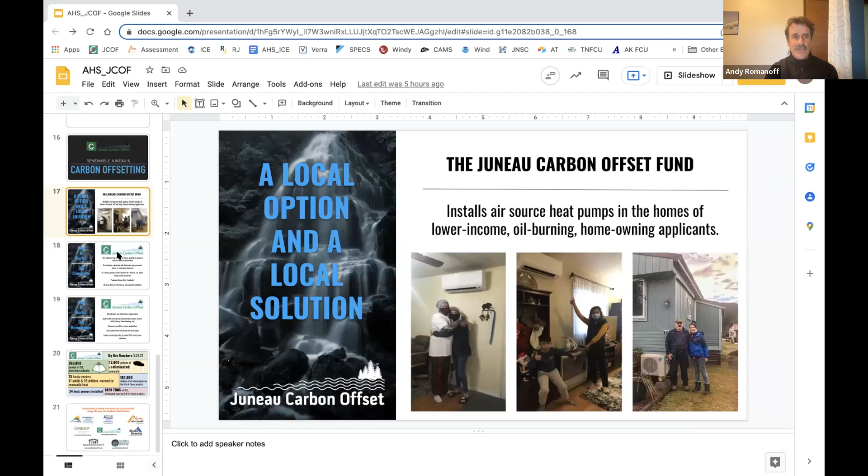We have a web store at juneaucarbonoffset.org where anyone can go and try out different options to calculate their own personal carbon footprint, or that of their home, family, trip, car, or their cruise to Alaska. There's a zillion different options there for people to choose from. Many people just decide to subscribe, and that's what I do—I calculated my family's carbon footprint.

It comes to about $25 a month, so I spend $25 a month automatically. It just gets charged to my card, and it's done—about $300 a year. It's really simple. Essentially the consumer goes to the store and buys their offset products, so to speak.

That revenue flows to our financial manager, the Juneau Community Foundation, which stores all our money and acts as a third-party verification body for us. At the other end, you've got the homeowners who find out about us through various ways and means. If they meet income requirements—essentially 80% of median area income or lower—for a family of four that would be an annual income of about $96,000. It's not a lot when you're considering all the expenses they may have.

If they burn enough oil, 400 or 500 gallons a year or more, then they're very likely going to qualify, as long as they're not buried in assets or their home isn't full of holes and whatnot. They can apply online and submit all their income and utility documentation to us. We have an advisory committee comprised of local community experts in housing, social groups, and energy efficiency, and they review applicants and their application materials.